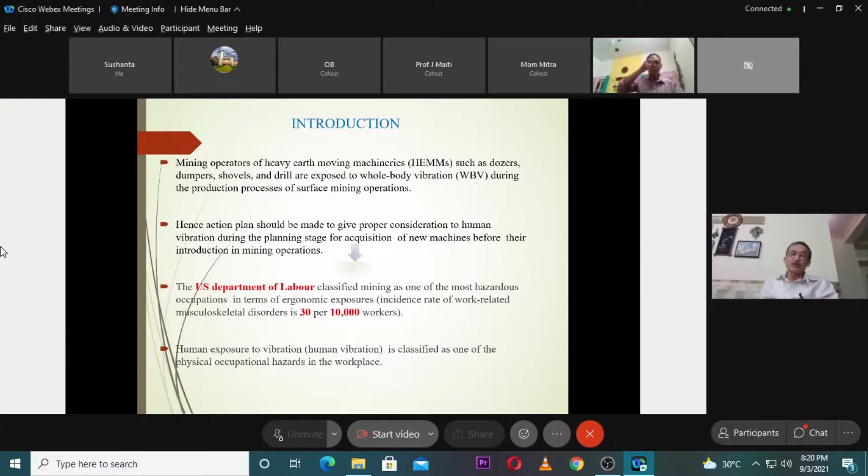Human exposure to vibration, also known as human vibration, is classified as one of the physical occupational hazards in the workplace. If you have any question, we'll take it up later on.

Now, in this direction, the DGMS, Directorate General of Mines Safety, the regulatory body located in Dhanbad - some of you know this well, Professor Maiti knows it very well - they are the regulatory body, and every 3 to 4 years they conduct this National Safety Conference. The 11th National Safety Conference was held in Delhi, and I get invitations for all these conferences because I have a good contact, or rather I am in touch with them since I came to India in 1992.

So in the 11th National Safety Conference 2013, held in New Delhi, the Directorate General of Mine Safety recommended that vibration studies of various machines before their introduction in mining operations should be done as per ISO standards. That is the first point - every equipment being installed at a mine, or existing equipment as well.

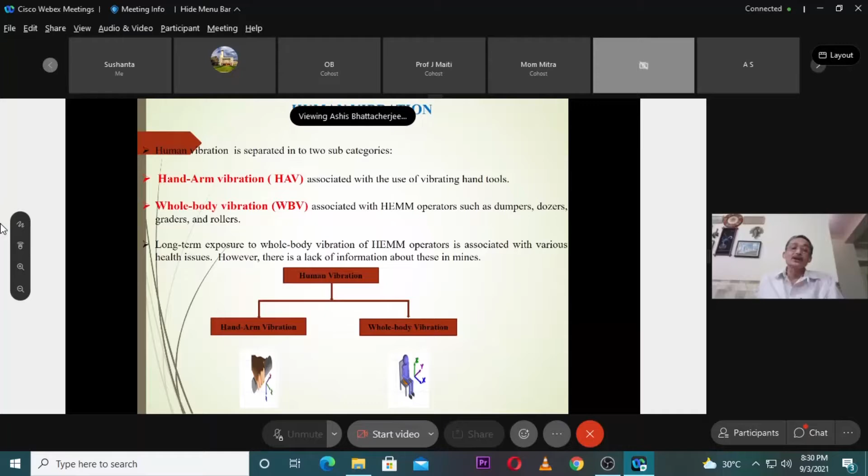The long-term exposure to whole body vibration of HEMM operators is associated with various health issues. However, there is a lack of information about these in mines. So far, awareness is slowly building up because of the DGMS recommendations, and also the recent coal mines regulation, where they have mentioned a few regulations related to the ergonomics perspective. So these are the 2 things. One is hand-arm, another is whole body.

So the motivation of this study: this was a study, as I told you, we conducted for Tata Steel mines. In fact, they approached us because of the severe complaints the management was receiving from some of the operators regarding different pains. Exposure to whole body vibration is an emerging issue for the mining industry and inherent to many mining operations.

These vibrations are caused by accelerations produced by heavy earth-moving machines during operation and are transmitted to the machine operators through the seat or the feet. So we can measure both, seat as well as feet. So we need six channels to measure the vibration both at the seat pad and at the feet.

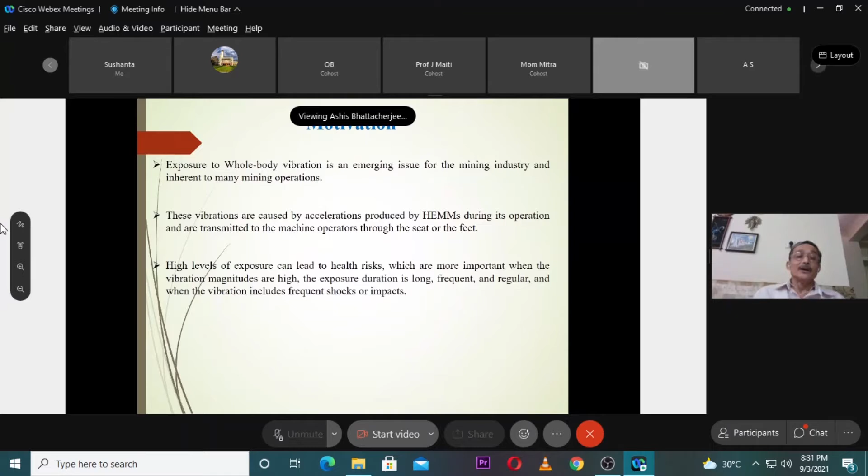High levels of exposure can lead to health risks, which are more important when vibration magnitudes are high, the exposure duration is long, frequent, and regular, and when the vibration includes frequent shocks or impacts. All these things are present for mining equipment, as the operators are in service for 20 years, 30 years, and some of them even more than that.

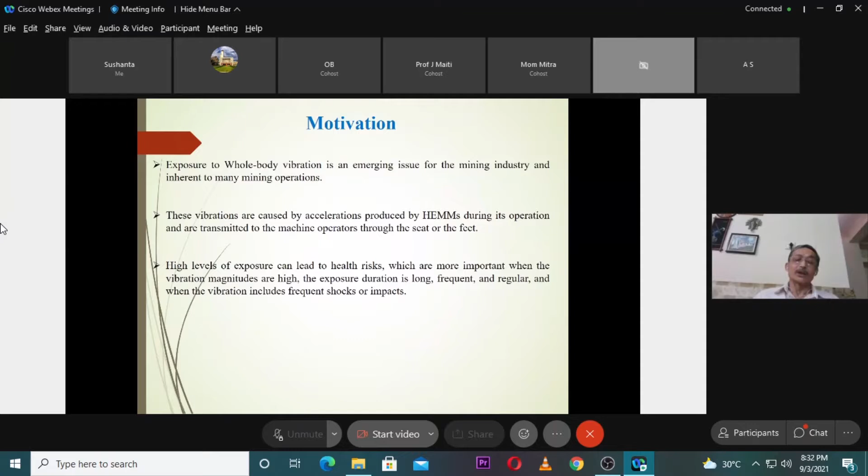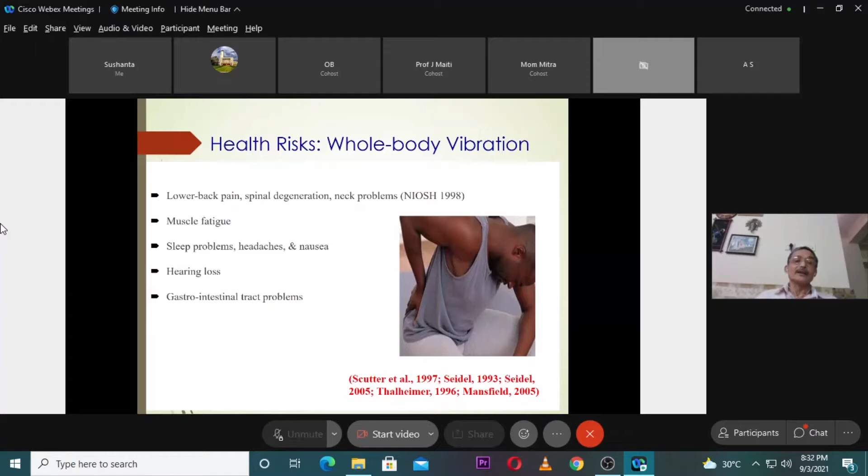Okay, so these are the various health effects of vibration. Low back pain, this is the major problem. Spinal degeneration, neck problems; NIOSH came up with several studies through which they found this. Muscle fatigue, then sleep problems, headache and nausea, then hearing loss, and then gastrointestinal tract problems. So all kinds of problems may take place.

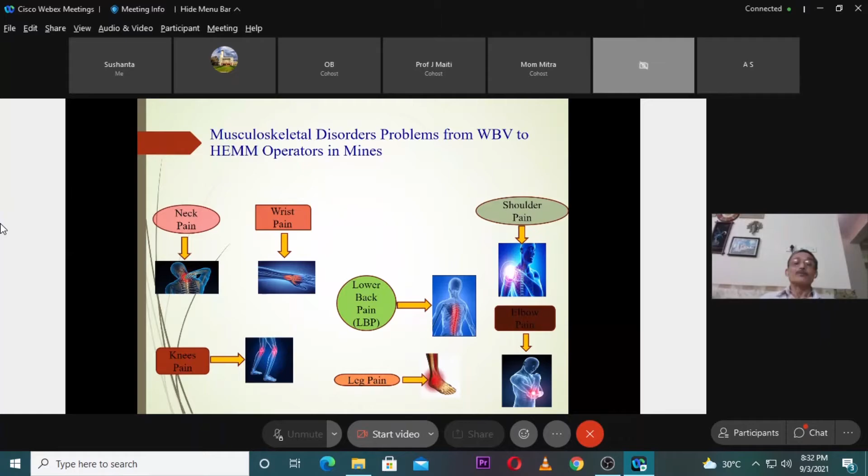So here you can see musculoskeletal disorder problems from WBV for HEMM operators in mines. So all kinds of problems: back pain, neck pain, leg pain. It's possibly not visible for you to study.

Globally, across the globe, several studies are going on in surface mines. Most of them are surface mines, because in underground mines, particularly in coal mines, if it is gassy, then regulatory bodies usually do not give permission to have these machines underground. Like in India, so far we do not have any permission, but we can do this study in surface mine. So if you look at the last 20 years, several studies have been done, mainly during the last decade.

And the vibration, as we will see later on, is measured by A8, which is the vibration for a duration of 8 hours. And based on the ISO limit, their health risk is given there. And similarly, the vibration dose value, which is the cumulative dosage the operator is receiving if they are working for 7 hours, or even some of them working at a stretch for 8 hours. So this is the picture.

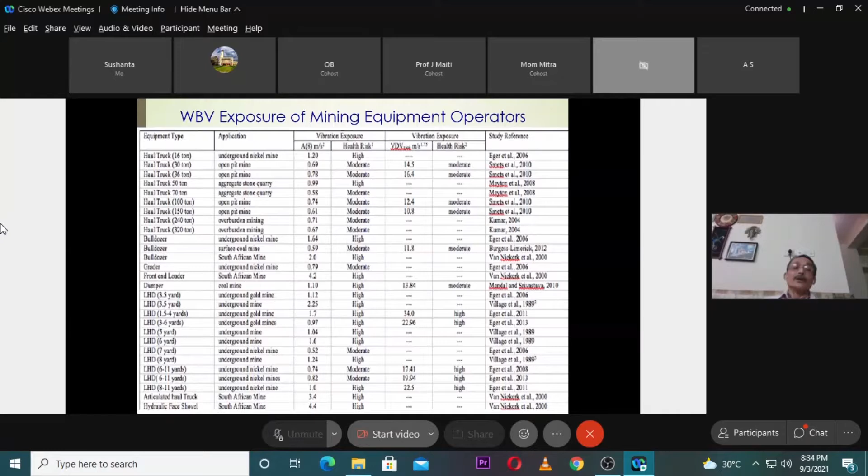Now when I say evidence, we have to keep in mind all these evidences are being established through epidemiological studies, but there is no one-to-one correspondence between the exposure to vibration and the various health effects of vibration. So till now, no such findings have come up from the medical side or pathological aspect. So the lower limit is 0.45.

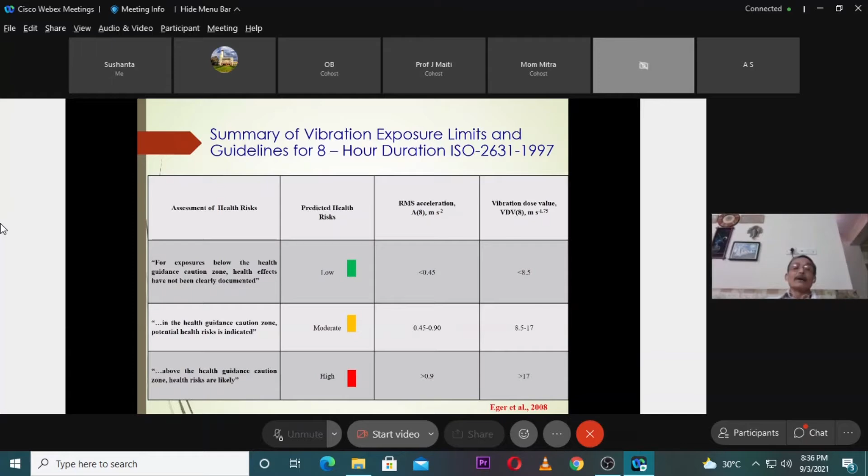So whole body vibration standards, I should not spend much time on this, cover the methods for measurement of periodic, random and transient vibration with regard to health. The considered frequency range for WBV is 0.5 to 80 Hertz, because most of our body parts vibrate within this range. So we have a natural frequency at which the body parts are vibrating. And then we have the vibration which is being transmitted from the equipment through the seat, where the accelerometer is being put on the seat.

So basic methods of measurement are frequency weighted root mean square acceleration and vibration dose value, applicable for vibrations transmitted to the body as a whole through supporting surfaces: the feet, the back, and the buttocks of a seated person. So this is a person sitting, and the X direction is the direction where their driving wheel is and they are looking in front. Y direction is the lateral direction and Z is the vertical direction, along the spine.

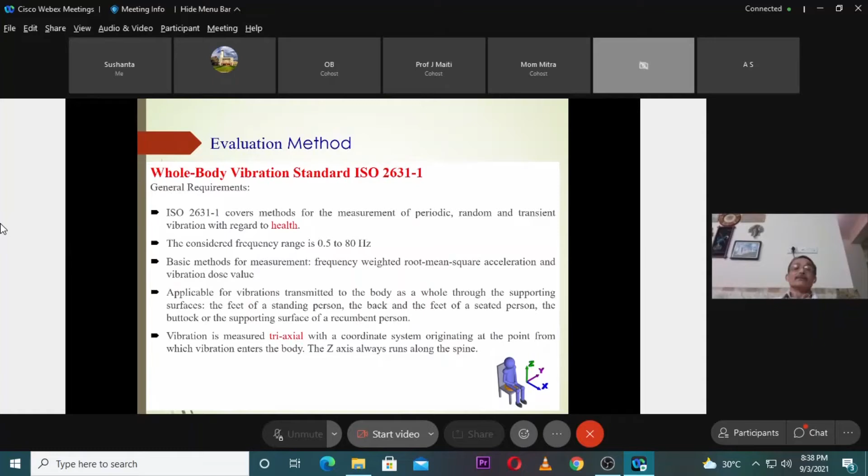And the evaluation methods, as I told you, there are two evaluation methods. One of them is frequency weighted root mean square acceleration. Another is vibration dose value. So whether we have to measure only this or we have to measure both will depend upon the crest factor, which is very, very important, which we have to measure for any equipment operator exposed to vibration, which is the maximum acceleration during the period of measurement over the average root mean square acceleration.

So this ratio is very, very important. If it exceeds 9, then we have to measure both frequency weighted RMS acceleration and vibration dose value. However, if it is less than 9, then we are happy with only measuring RMS, root mean square acceleration.

So this slide also may be very small. It may not be visible. So as I told you, there are two measures. One is frequency weighted RMS acceleration and the other is VDV. Oh, I'm sorry.

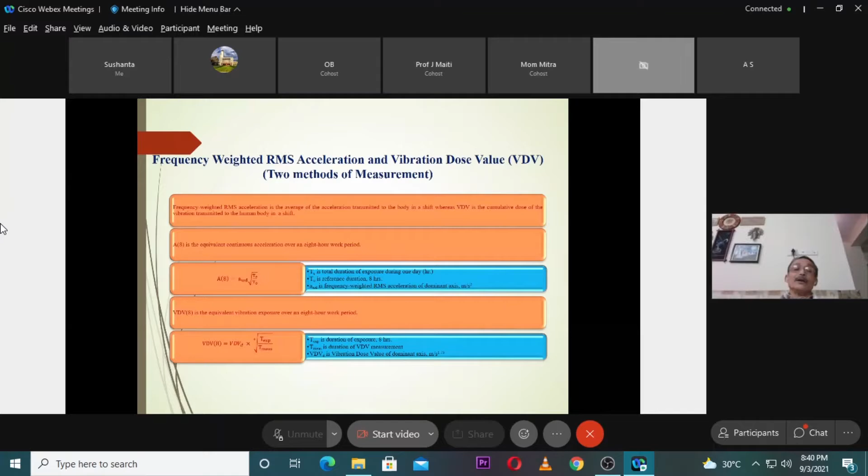Okay, so now we will slowly approach health and safety data analytics. It applies two very powerful techniques, statistics and data mining. It models relevant previous data, and then we can find trends, patterns, relationships, and do prediction also. So all kinds of things which you all are familiar with.

There is nothing new in today's mining industry due to automation. It is not only because of Industry 4.0, but in mining, automation and digitization came up in a big way before Industry 4.0 came into effect. A huge amount of data directly or indirectly related to health and safety is being generated and collected. As a result, a large amount of data piles up on a regular basis, which is difficult to handle manually.

In fact, unfortunately, in the Mines division of Tata Steel, they are not handling this huge data being generated, particularly in this vibration study with the data captured through sensors. Though data is available, not enough analysis is being done to create meaningful information to assist in the decision-making process related to enhancement of safety in mines.

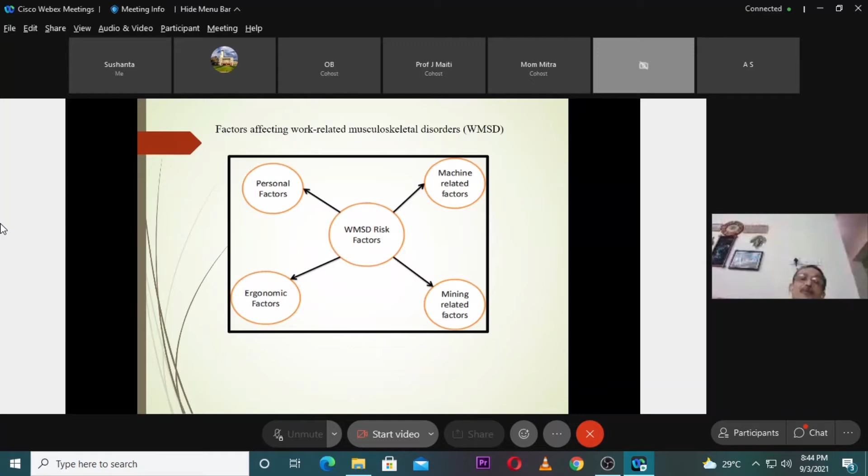Okay, so these are the factors which influence WBV for mining equipment operators; it can be applied to all the same. So we have personal factors, as I mentioned in the previous slide. We have ergonomic factors, mining related factors, and machine related factors that finally lead to work related musculoskeletal disorders. So we have to identify the cause and effect relationship of vibration, which eventually leads to work related musculoskeletal disorders.

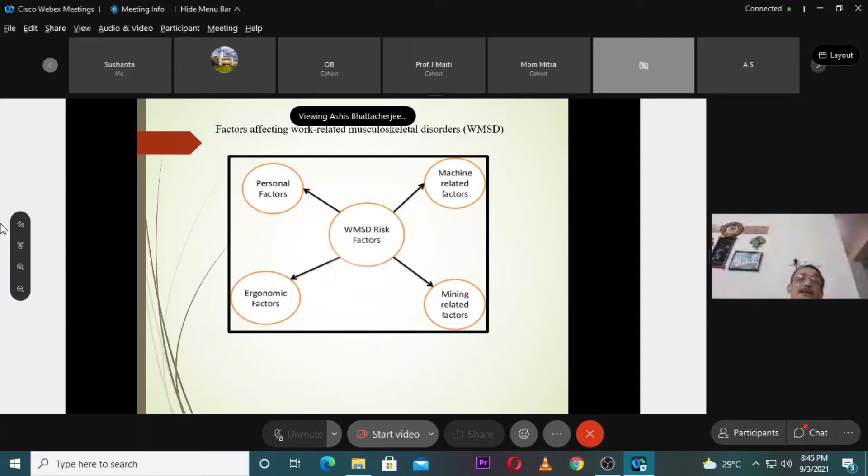So, as you can see, these are the various causal factors that we consider. We have considered them for Tata Steel mines also. For personal factors, we do not go into too many; we take the main factors which influence vibration based on literature search. Age of the operator is very, very important. As the operator becomes older, they will have more MSD problems.

Then weight of the operator, which is very, very important. If they are bulky, then they cannot take up the erect posture which they should be taking when they are sitting in the operator seat.

Then machine related factors: age of machine, load versus no load condition, then average speed of dumper. This is very, very important. What is the speed at which the dumpers are flying? So we capture all the speed from the GPS data that we collect from their fleet management system, which we make use of for different purposes.

Ergonomic factors: the main important thing, we measure the awkward posture. That is the dynamic posture as well as the static posture. Okay, we measure all kinds of awkward posture and we take it into consideration in our analysis. And then

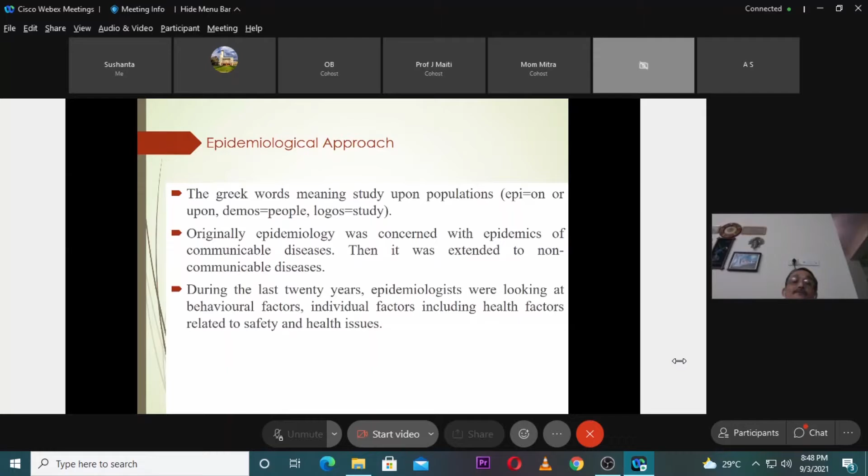Then there are three types of study designs. When we talk of the study design, we have a collaboration with the French National Institute of Health and Medical Research. Their team helps us, we collaborate with them for the design aspect of the study. Prospective cohort study design, retrospective case control study design, and the third one is cross-sectional study design. This can be applicable to study any disease or any type of injury.

Prospective cohort study design, as I told you, is particularly for non-communicable diseases; when we set up dust standards, or when we say cigarette smoking is injurious to health, we carry out this type of cohort study. So a prospective cohort study is a study in which a cohort of subjects with exposure and without exposure is observed for a specified duration. The number of subjects that develop the injury/disease of interest is noted.

And this is also known as a longitudinal study, through which we can establish the temporal relationship, that is the cause and effect relationship. A retrospective case control study is a study in which two groups of individuals are identified. A group that has faced a disease, like in this case the different MSD problems or injury, known as the case group, and a group that has not faced any disease or injury, the control.

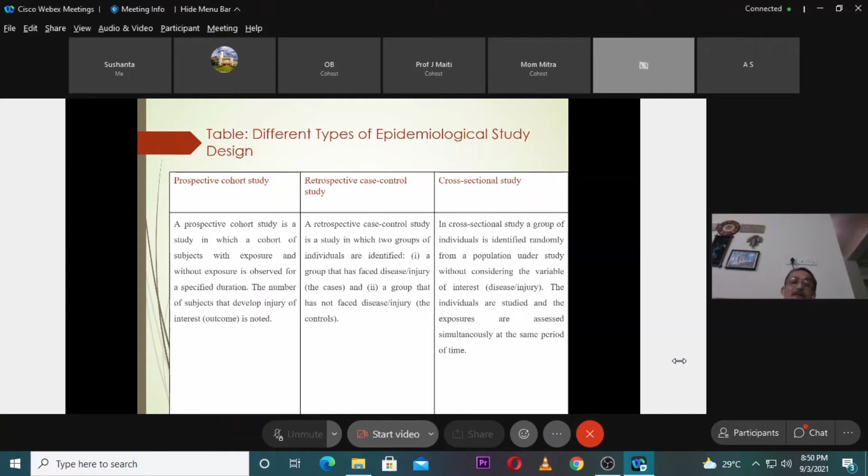Okay, field investigation. As I said, I will talk about the application aspect of this theoretical thing. So field investigation: we carried out this study for Noamundi as well as West Bokaro mines. This is for Noamundi and Katamati mines I am projecting, which we carried out very recently. WBV exposure measurements were performed according to the standard procedure described in ISO 2631-1 1997 and also 2010 guidelines.

A triaxial seat pad accelerometer, the model we use is for NOR 133-1286. We have three Norsonic instruments. One of them is NOR 133, which is a 3-channel machine. Another is NOR 136, a 6-channel machine through which we can measure the vibration at the seat pad as well as at the feet.

It was placed on the machine in accordance with the ISO 2631-1 1997 guidelines with regard to direction and anatomical position. As I mentioned to you, the direction towards the operator where the driving wheel is, is known as the x-axis, the lateral dimension is the y-axis, and the vertical one is the z-axis. It was measured in a 3-axis coordinate system. This was carried out with NOR 133, but then eventually we switched over to NOR 136.

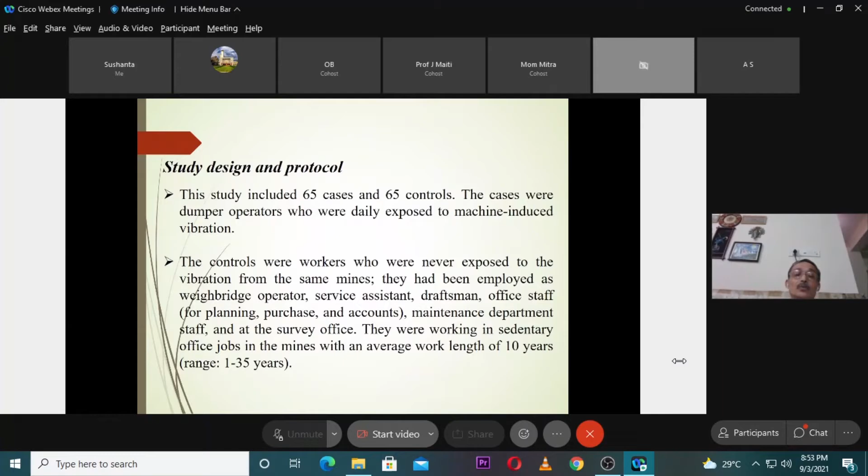So the study protocol consists of a request for participation of subjects and data collection through face-to-face interview, because most of them are not literate. So we had to carry out face-to-face interviews during their break period, as most of the dumper operators could not read and write.

The mine management was informed, and it was approached by Tata Steel, so obviously we got full cooperation, and all types of data were shared with us. For most of the workers, the interview was done, as I mentioned, during the break. Then analytical epidemiology was used to analyze MSD.

Then WBV exposure of some dumper operators in mines. So this is the Noamundi mine and Katamati mine. Those who have visited, I understand Professor Krishna has visited this mine. I'm not sure whether Dr. Maiti could get an opportunity to visit this, or maybe he has visited also.

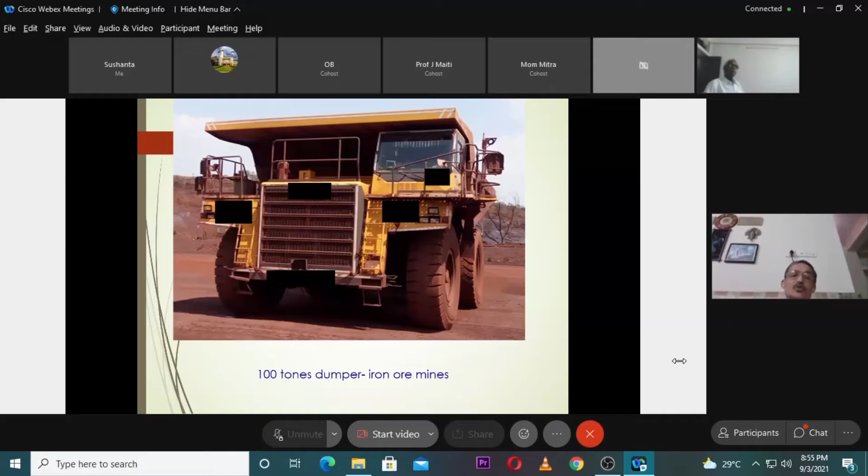So this is a 100-tonner Komatsu dumper. They have purchased these equipments in different installments. In 2005, they purchased one lot, 2011 one lot, and in 2016 or so, another lot. And so we could get all types of dumpers. Some are very old, some are very new.

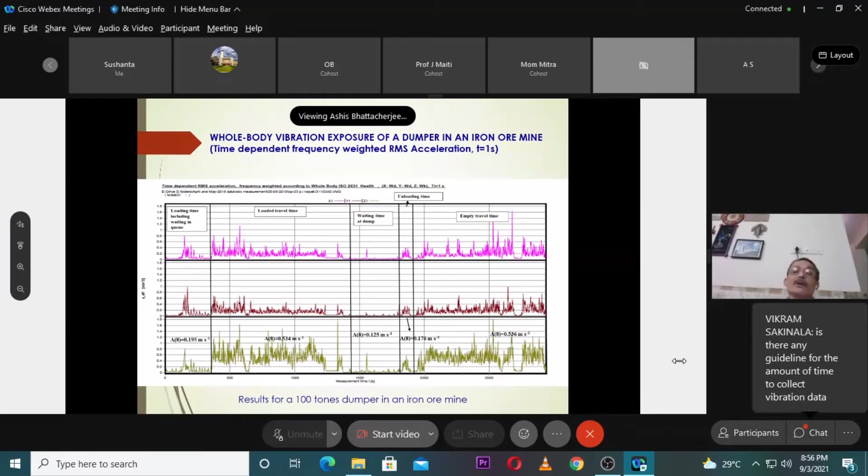Now this vibration meter captures data at an interval of 0.037 minutes, so you can imagine the volume of data that gets collected. So this is the y-axis, the lateral direction, and this is the vertical axis, along the spine.

So through the GPS data, we could segregate these times, and then using the software, we could get the average RMS value during each of the activities during an entire cycle. This is the loading time, loaded travel time, when the vibration is close to 0.534. Then this is the waiting time and dumping, where vibration is reasonably small.

Then we have the empty travel time. Again, here also you can see vibration is very, very high. So if you look at this RMS acceleration, you can see the Z direction is the dominant axis. So it will cause more health effect in the Z direction than X and Y direction.

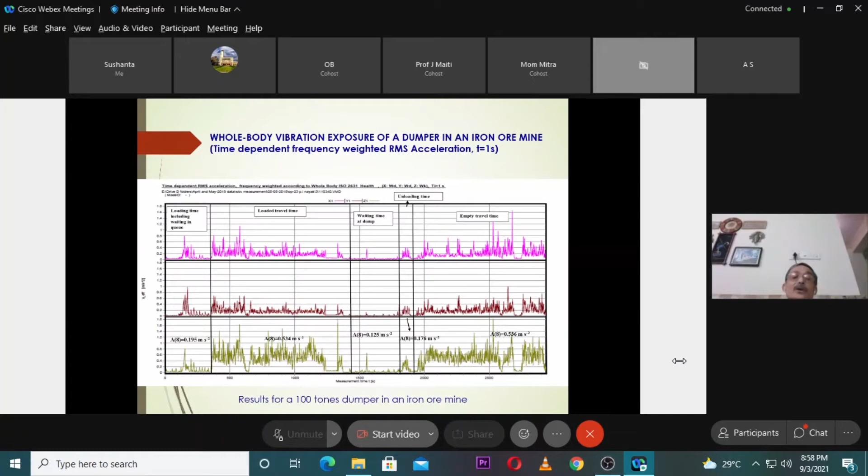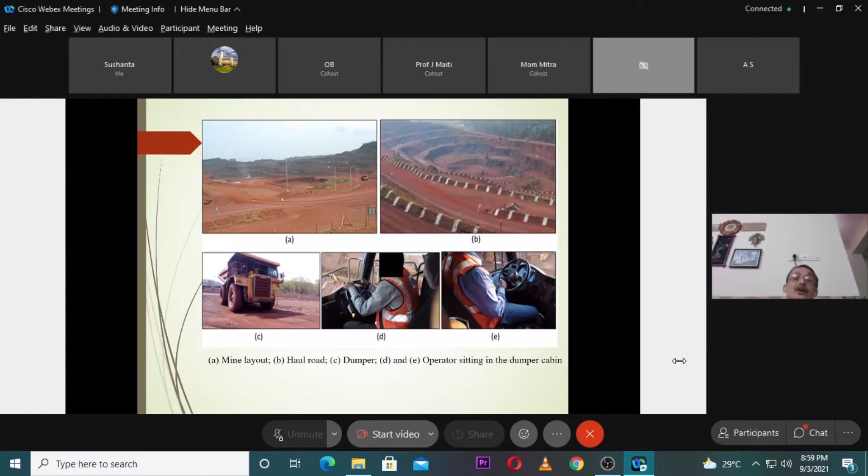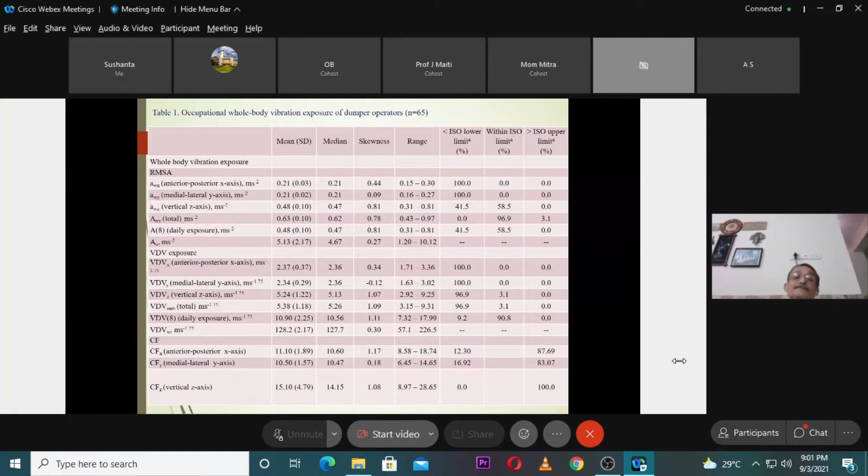This is based on the Nordic questionnaire; we prepared a questionnaire format and collected this data. Not only did we verify it from occupational physicians, but we also collected this data through a questionnaire survey to the operators. So out of the 65 operators...

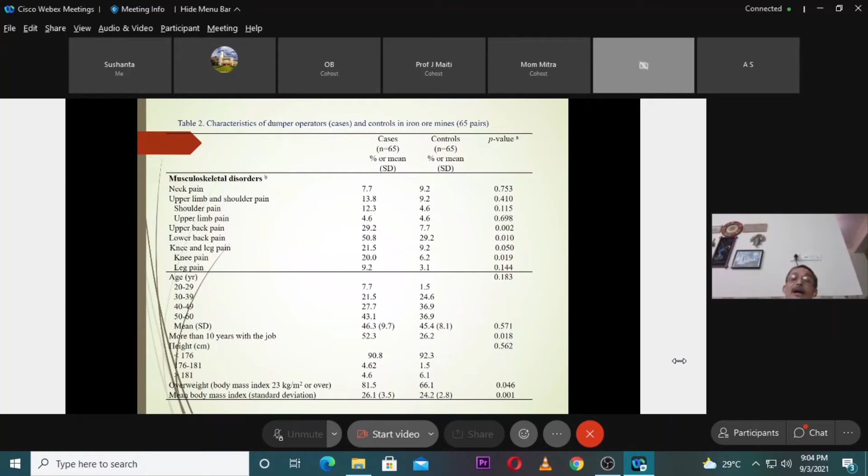Similarly, we looked at age-wise distribution of that. So this is what then we carried out logistic regression to find out a causal relationship between the risk factors and the disorders - but before that, this is not the one.

Here the dependent variable is the different type of disorders, and the independent variable is the cases and control. So both of them are binary in number, cases and controls. This is the table.

We calculate the odds ratio, and now we have adjusted this for age and overweight. So individually, we ran this model for neck pain, taking into consideration also age, overweight, and obviously case and control, that 1, 0 will be there. Now, as this is a binary variable, we have to end up taking a logistic regression model.

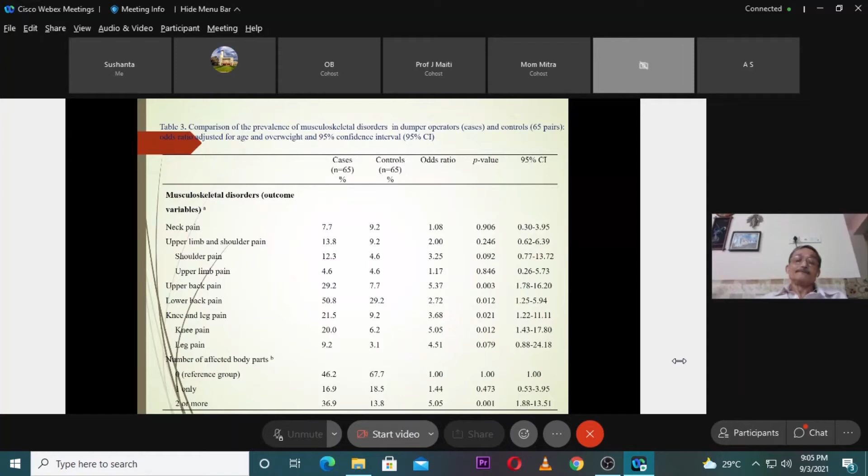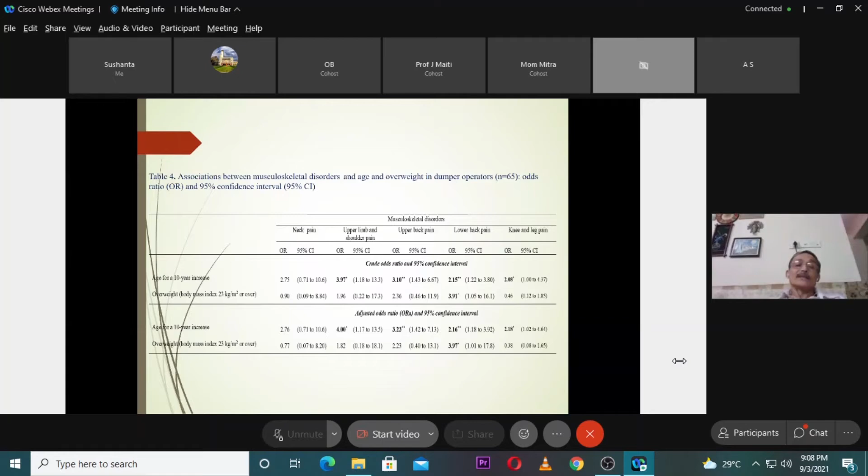So how do we interpret this? For example, upper back pain or lower back pain, for the dumper operators, a 10 year increase in age, their chances of injury compared to those who are not suffering, is 2.16. So this is what is the adjusted odds ratio.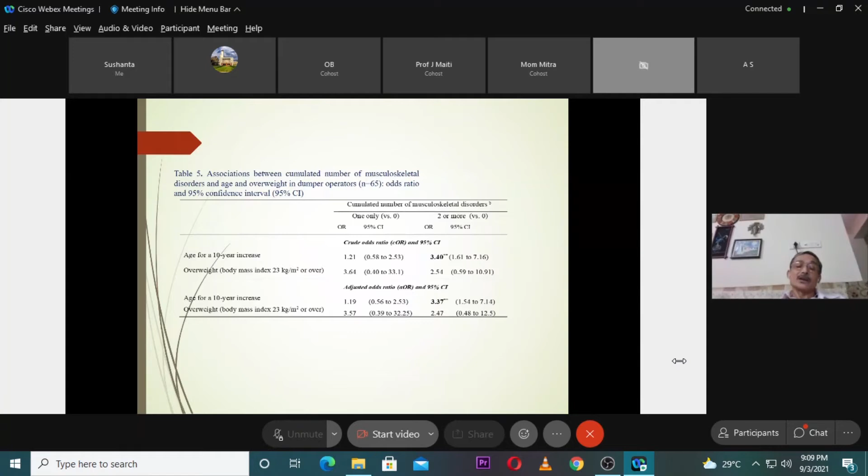And this is what we carry out, the musculoskeletal disorder analysis, using the adjusted odds ratio, where our independent variables are age, overweight, and the dependent variable is the dumper operator suffering from some type of musculoskeletal disorders. So one of the major causes is the ergonomic factor.

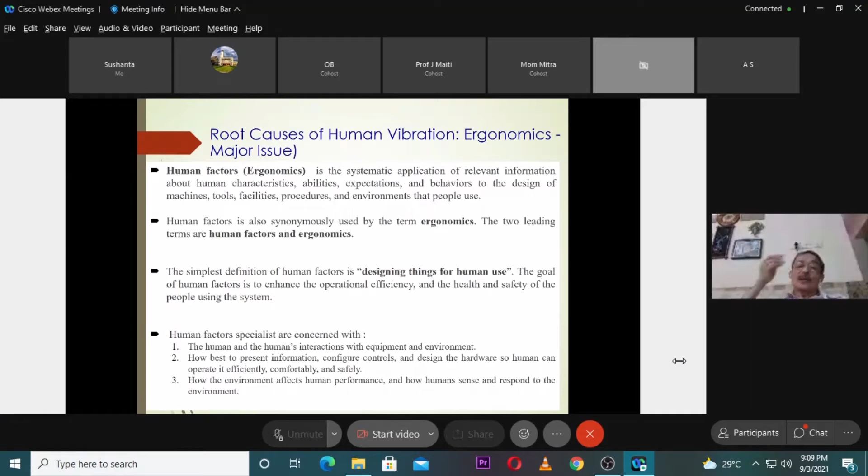I will quickly glance through this, as most of you are familiar with ergonomical issues being one of the major factors besides the other factors which are there. We carried out static as well as dynamic body posture assessment. For dynamic, we used REBA, rapid entire body assessment, and for static body posture, most of you are familiar with, we measure through anthropometer.

This helps us understand through static body posture whether the operators are matching with their seat, even though all the dumpers are ergonomically designed as claimed by the equipment supplier. But we find when we consider the body dimension of Indian workers, they are usually comparatively shorter compared to a European or American worker. Obviously, as most of this equipment is supplied either from Europe, USA, or Japan, it is related to their dimensions. So two types, as I said, static and dynamic.

So we measured anthropometric measurements of the dumper operators. Some of the important measurements we took: sitting height erect, sitting height normal, given in centimeters, then knee height, popliteal height - from the floor to the buttock periphery - then buttock knee length, buttock popliteal length, and buttock width. All these dimensions were measured: the mean value, standard deviation, maximum value, and so on and so forth.

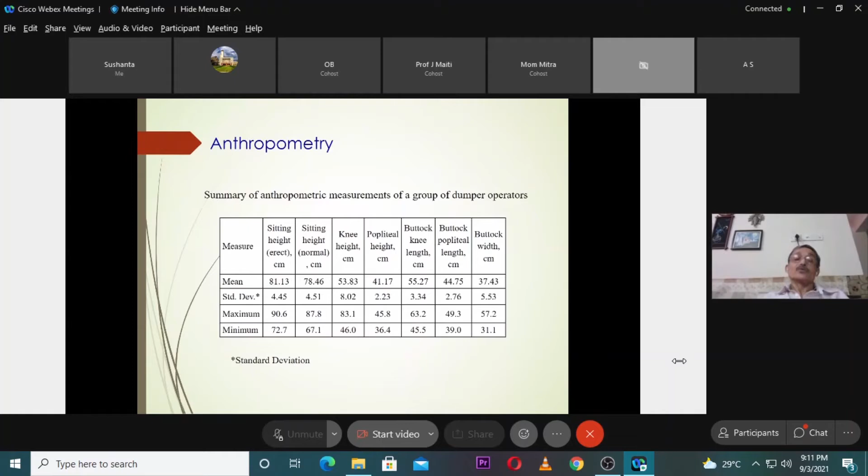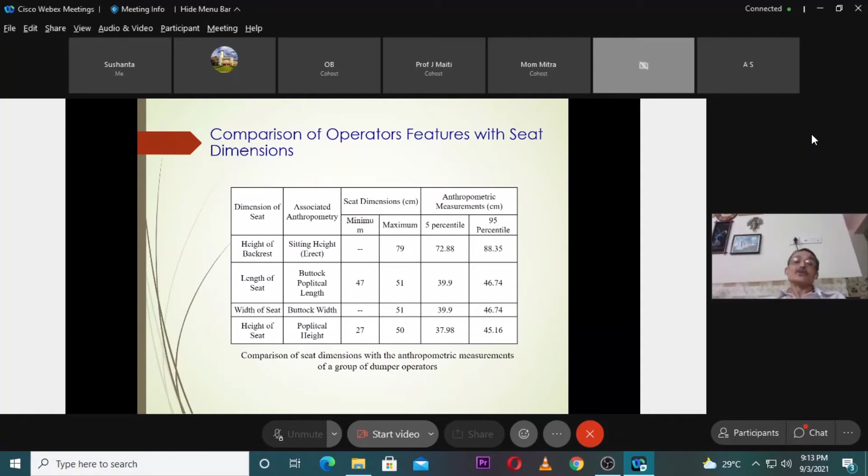Besides, when they are operating the vehicle, the dynamic posture comes in, which is beyond our scope. So let me summarize some of the conclusions, based on the DGMS recommendations and several studies conducted by the research team of IIT Kharagpur in different mines.

Based on our study, what we could find out is the vibration studies to assess the health risk. Moreover, all the machines must be tested for vibration exposure, so that they do not exceed the lower limit, which is given there based on ISO 2631 and amended version.

From the vibration study of dumper operators, the dumper operators were found to be exposed to moderate to high health risk, which requires immediate action. The vibration exposure time for these operators should be reduced, and also there will be a scope of job replacement.